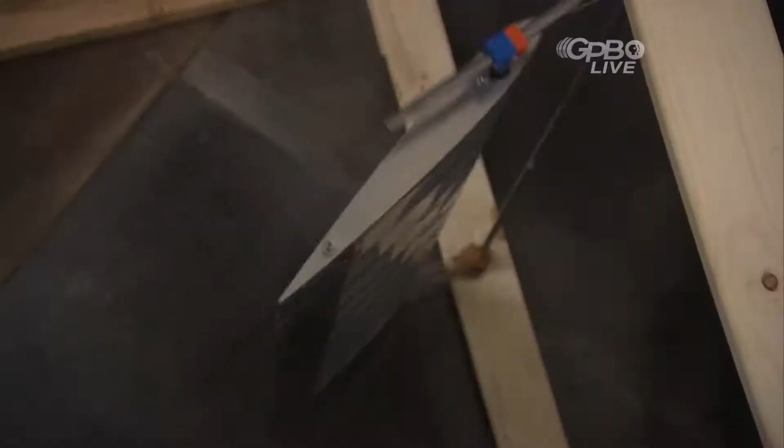Live from the campus of the Georgia Institute of Technology, it's the 2013 Georgia Tech InVenture Prize. Join us as the nation's brightest students unveil the future and compete to win $35,000 in prizes and patents. Now, please welcome your host from Georgia Public Broadcasting's new series, The Future Files, Faith Salie.

And welcome to the 2013 Georgia Tech InVenture Prize. I am thrilled to be back in Georgia on this amazing campus and your host for this evening. And I'm feeling a little overdressed. Do I have goggle face? Right? It's like hat hair for really smart people, right?

Okay, there, that's better. You are about to see a fantastic show because as impressive as this school is, tonight's show is about the best of the best. The 6 teams you'll see tonight have been working on their ideas for anywhere from 6 months to 16 years.

That's right, several of them were inspired by moments from their childhood, and they've used that inspiration to create some extremely sophisticated inventions. Now, this is not exactly what I would have been inspired to invent at that age. My ideas would have been something more like, ice cream that turns into puppy dogs when you lick it. Now, I'm not saying that's a bad idea, but these are much, much better.

One of the biggest problems that we found was shrinking down the transformer into a smaller size. With a little creative circuit design and many long nights, we found a way to make it possible. One of our not so fortunate prototypes actually exploded on us in the lab last night. Yeah, that design went out with a bang.

We think we have a good shot at winning the InVenture Prize because we're addressing a problem almost everybody has. There are over 100 million smartphone users in America, and we feel that we have a solution that will help all of them.

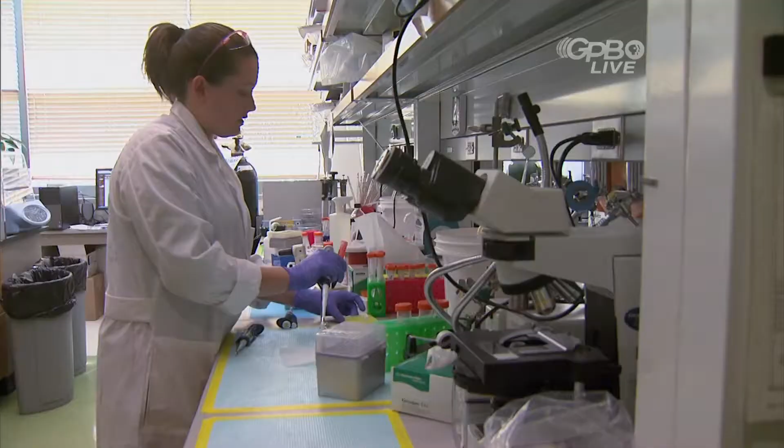Hello, my name is Erica, and I'm part of Team AnemoCheck. The AnemoCheck started as a senior design project in the biomedical engineering department.

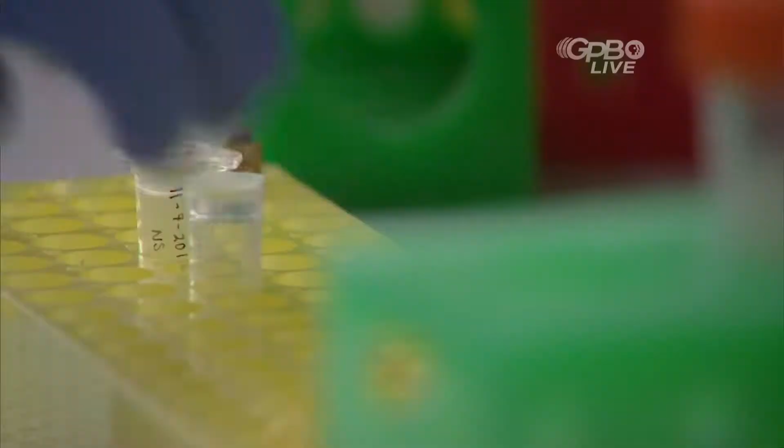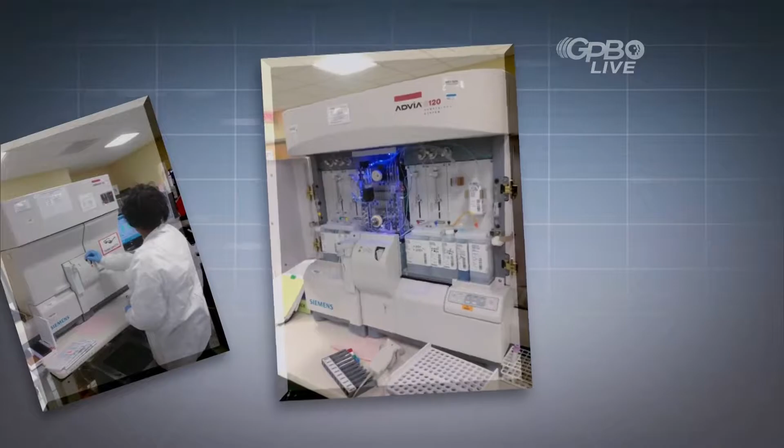Our aim was to create a way to monitor and screen for anemia in a disposable and inexpensive way. There are a lot of problems with current anemia screening. The golden standard is using a hematology analyzer. These machines cost tens of thousands of dollars. They require trained technicians to use, and there are just a lot of problems for people that want to screen themselves multiple times a month, on a weekly basis.

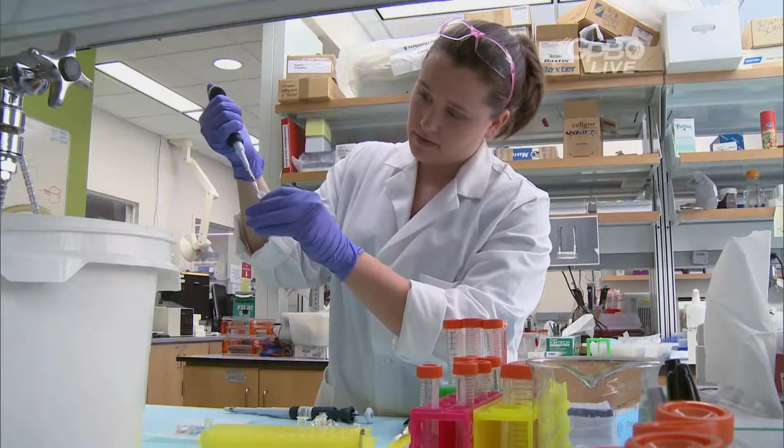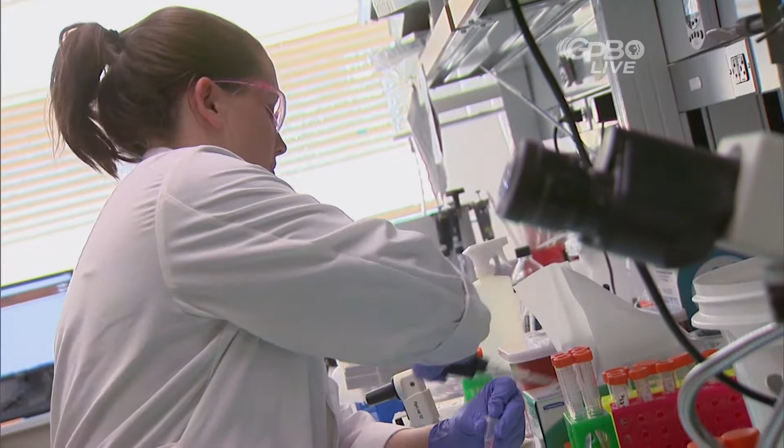We found a way with the AnemoCheck to give people the option to test themselves in the comfort of their own home. We've given them empowerment to see how they're doing when they want to be tested. It's very important for them to actually know, and it gives them a little bit more convenience and comfort. I think my project would help millions of people in this country alone.

I was very driven to work on this project as a senior at Georgia Tech because I had issues with anemia when I was growing up. It just made it all the better finishing off my career at Georgia Tech to be able to work on this.

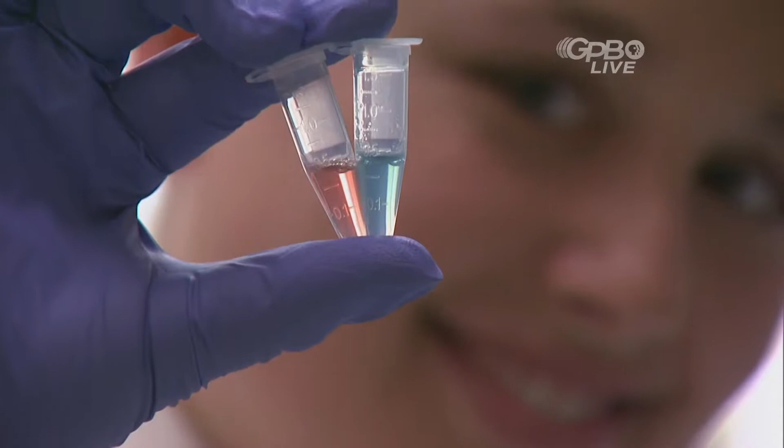They had started thinking about their idea many years ago. So let's not make them wait any longer to present it.

Good evening, ladies and gentlemen, esteemed judges. It's my absolute honor to be here tonight. My name is Erica, and I want to talk to you about anemia.

Anemia is the world's most common blood disorder, affecting 1 billion people yearly. In fact, it's so common, 100 of you in the audience tonight are being affected by it right now. Anemia causes fatigue and tiredness, but in severe cases, it can cause brain damage or even death.

And we've all been screened for anemia. We've gone to the hospital, had to wait in line, endure a venous blood draw, and had to wait longer for people to process our results. If you're healthy, this happens once or twice a year. But for 15 million Americans, this happens on a monthly or even weekly basis. This is just too inconvenient and costly for people to have to do.

I'm proud to say we've invented a solution. The AnemoCheck is an at-home anemia screening test. It's very simple to use. All one does is prick their finger, collect blood, put that blood into our chemical tube, mix, and wait. After 45 seconds, the final color in the tube correlates to a hemoglobin level.

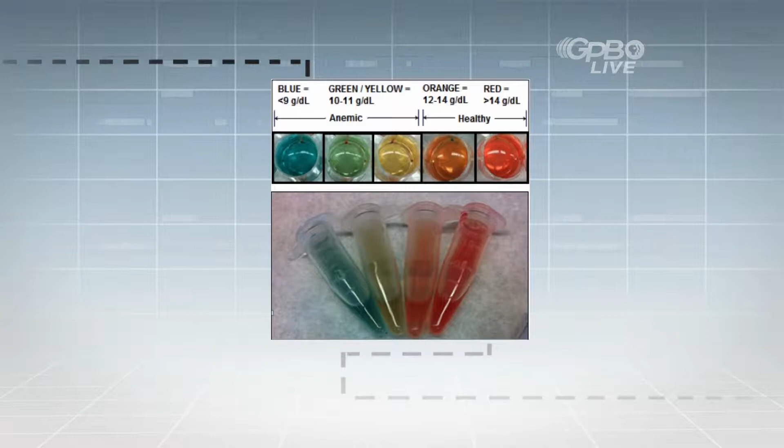The colors range from blue to red, as I have here, indicating different levels of anemia along the way, if any is present. What we've been able to do is take a known chemical reaction and turn it into a whole blood diagnostic test. No one has ever done this before. It's novel and non-obvious.

Now I'd like to shift gears. I have with me Reginald and Rob, and they've just tested themselves tonight using AnemoCheck right in front of you on stage. In a short amount of time, I have their results for how they're doing.

I hope you can focus in on that, but they're quite different. As you can see, Reggie's results indicate he's healthy and not anemic. But in contrast, Rob's indicates that he is moderately anemic and should be treated.

Rob, could you tell the judges a little about yourself? I'm Rob Menino, and I have thalassemia. Thalassemia is a genetic blood disorder that causes me to be chronically anemic. And for treatment, I require regularly scheduled blood transfusions.

But with this device, I would be able to schedule my blood transfusions for when I really need them, as opposed to guessing when I'm going to be anemic. And recently, I've gotten the chance to actually use this device, and I would buy it. Thanks, Reggie. Thanks, Rob.

To close, I just want to tell you, I've been working on this throughout my undergraduate career, and since graduating in May, I've joined a lab jointly at Georgia Tech and Emory in order to pursue this idea. Since May, we've gone from clinical feasibility through verification testing, and we are now IRB approved in a clinical trial on real patients.

I'm really proud of that, and I hope you can see the value we have here. Alongside our clinical trial, we want to prototype our design with the Global Center for Medical Innovation. We want to bring new ideas to the table for making this a user-friendly product.

While there's no clear path to winning the Georgia Tech InVenture Prize, our invention will win the InVenture Prize. I should win this InVenture Prize. I should win this year's InVenture Prize.

All of this year's contestants had access to plenty of advice on the best way to make it to tonight's stage. That advice started last November when former InVenture Prize winners visited the Georgia Tech campus. This really helped kick all that off and get me going in the right direction.

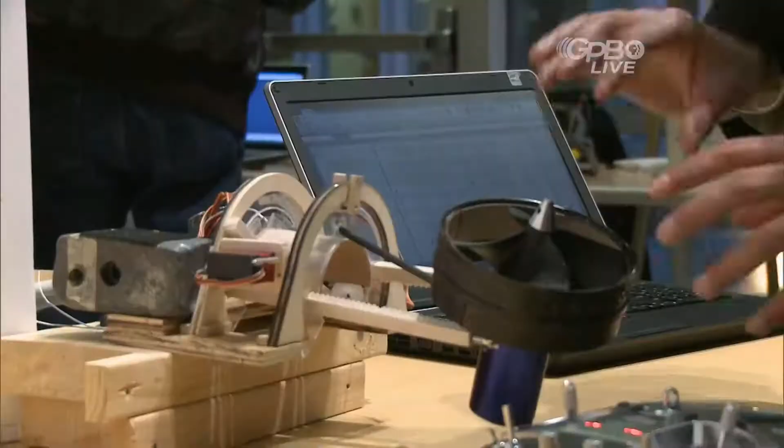That was enough to jumpstart participants to December's capstone event, where 80 teams unveiled their inventions to the masses in the biggest capstone event ever. Thank you all for coming tonight to the Capstone Expo.

I got some news for you. Organizers gave 10 lucky teams golden tickets, allowing them to skip the quarterfinals and go right to the semis.

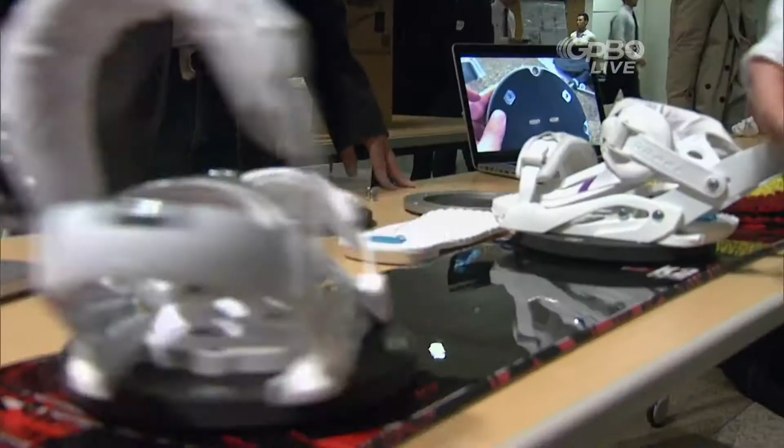Of course, teams at the quarterfinals had their work cut out for them, trying to stand out among 60 new inventions, including everything from a twist on the classic umbrella—the umbrella itself is inverted—to a flying car. Yes, I am inventing a flying car.

And contestants found one line consistently got the judges' attention: My invention will save many people's lives. It can save lives. This could definitely save lives.

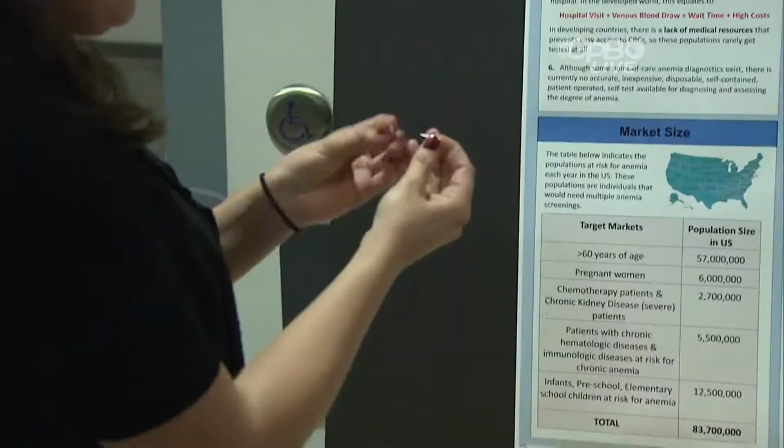From this diverse group of competitors, 26 advanced to the semifinal round, and this coveted category came with an invitation to a Flashpoint workshop to get one more round of advice.

Tonight's work is all about getting your pitches ready, before having to face their toughest questions yet. How are you going to convince people that it actually works? Show us that you've done your homework. I mean, if you guys are serious, or if this is just a school competition, I don't know.

And after the last idea was pitched—we've come here today to show you a product and a solution, now is really the right time for this device to come along, and it will provide our users with a step-by-step solution—the last question was asked: Does it work on raccoons?

6 teams remain standing. Oh, that's pretty cool. Leaving just one question unanswered: who will win the 2013 Georgia Tech InVenture Prize?

Who will win this year's InVenture Prize? Luckily, I'm not eligible—lucky for me, that is, because I'd probably embarrass myself. Need I say more than puppy dog ice cream? The point is, it could be somebody you've already seen, or it could be someone you're yet to see.

It could be these guys. Hi, I'm Zach Zaleski. I'm Joe Hickey. And we're Team Infant Sleep Solutions.

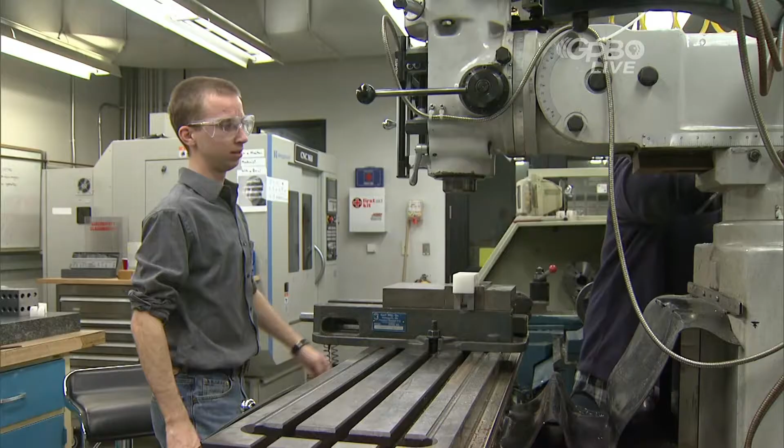So one of the big problems facing parents is some children are difficult to put to sleep. One of the effective means that parents have found is to take them on a car ride. There are a lot of products to help you put your baby to sleep, but they all have shortcomings—they're bulky, they have limited motion patterns, they're just not effective in putting your baby to sleep all the time.

We actually came up with this idea last August, and we worked on it for about 30 hours a week for 4 months straight. The coolest moment was about 3 months into it, when we finally had a product that was able to produce soothing motions and combine all the systems together.

Last semester, we had the opportunity to compete in the Capstone Design Expo. Team Infant Sleep Solutions, come on! And there we won the People's Choice Award, which confirmed to us that our device is something that people want and will do well in the market.

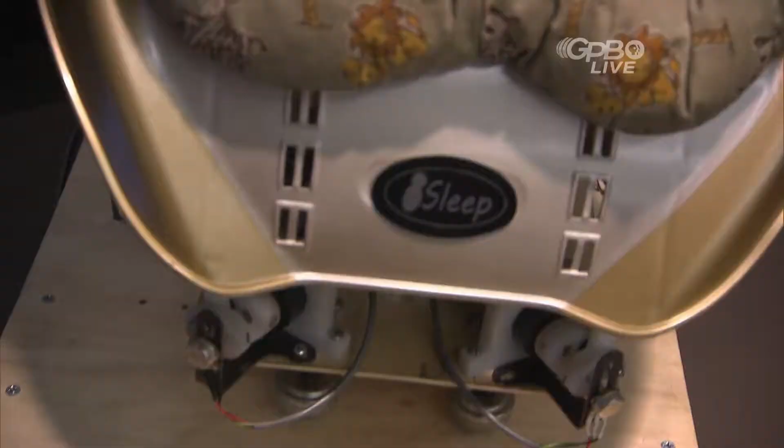I think we have a great shot at winning InVenture because we have something that people actually want. We've had the opportunity to show it to a lot of moms, and they always say, 'Where was that when I was having my kids?'

Intrigued. I'm a little creeped out by that baby, but I'm very intrigued, and I'm sure our audience is too. So tell us what you've got.

Team iSleep. Hi, I'm Zach Zaleski. And I'm Joe Hickey. Together, we are Infant Sleep Solutions, and it is our honor to present to you the iSleep. My 10-month-old niece inspired this product because, like many babies, she sometimes has trouble falling asleep.

Whether they're too overstimulated or tired, car rides are a proven effective method to help children fall asleep. However, it can be incredibly inconvenient to go for a car ride every night, and some of the alternatives that caregivers come up with in their desperation can be a little bit dangerous.

I had a taste of some of the difficulties that families can face on a daily basis when I was visiting my brother and his family. My niece just didn't want to take a nap. She cried and cried, and nothing would calm her down.

So we put her into her car seat and clipped it in the stroller to go for a walk. After a while, she fell asleep and we brought her back inside. But as soon as we put her car seat on the floor, she woke up again crying. I rocked her car seat back and forth and side to side, and she drifted back off to sleep.

And that's when it hit me: why is there nothing that can do this?

Combining my experiences with stories from friends and family, I set out to use my Georgia Tech engineering skills to make something that could mimic the motions and vibrations of going for a walk with my niece or taking her for a ride in the car.

We wanted to make something that'd be safe, comfortable, and convenient, and could help your child fall asleep without ever having to leave the home. It's with all that in mind that we created the iSleep, a soothing motion platform that can recreate that walk in the park or ride in the car and help fussy babies fall asleep and sleeping babies stay asleep.

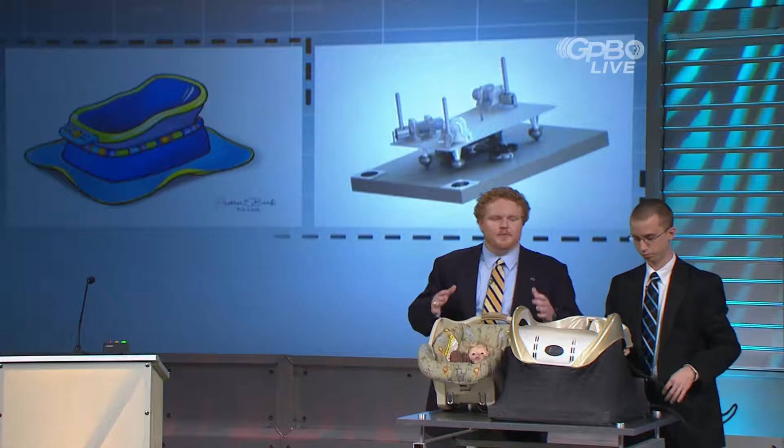When parents bring their child's car seat in the house, they set it on the floor, taking up space in a room that's already filled with a crib, stroller, diaper bags, toys, and all the other things it takes to raise a child. Instead of wasting that valuable space, simply take your car seat, clip it in the iSleep, turn it on, and your infant soother is ready to go.

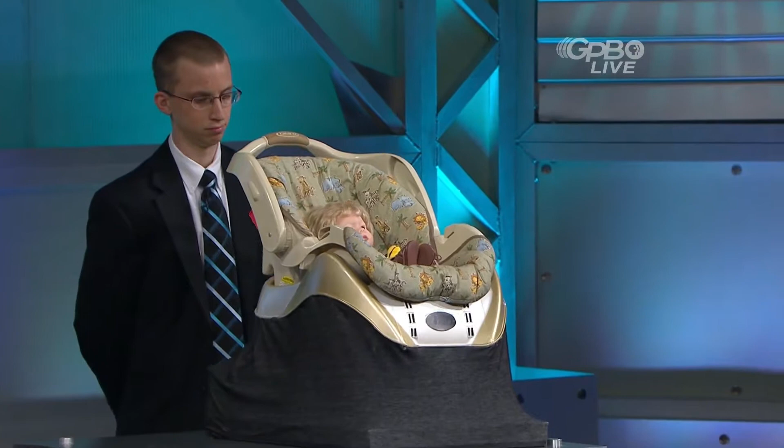Last semester, we had the opportunity to compete in the Capstone Design Expo, where we won the People's Choice Award, which confirmed to us that this is a product that the moms and dads of America want. We've also had the opportunity to share this design with some moms groups, where the reception has been overwhelmingly positive. They always ask, where was this when my kids were younger? Or, can I buy this one and take it home today? Because they believe that this is the device that will change their lives.

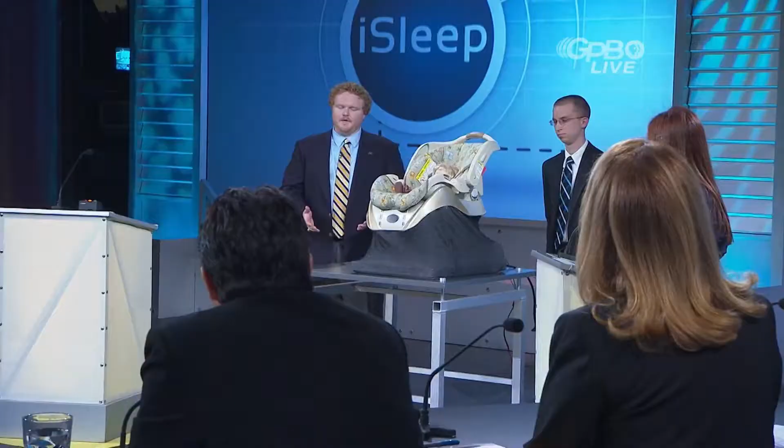And it's not just parents that are interested in the iSleep. We've attracted the attention of a major infant products manufacturing company. Winning InVenture would move us one step closer to getting this great product into the hands of moms and dads everywhere. Thank you for your time and consideration.

Well, guys, I have a baby and I don't have a car, so sign me up.

But judges, what do you think? So tell us a little bit more about the motion patterns. You said a walk or a drive. Are there two different settings? How does that work? So we have multiple different motion profiles you can select from. We're still refining those. But what we did was we did some accelerometer logging with car rides and some various competitor products, and then compared that to what we're able to generate with our device.

What price point are you thinking of entering the market at? So the way it's currently designed, we're targeting around $250. We'd like to further refine that and get it down to about the $180 price range.

And I know you did a pretty extensive category review while you were working on this project, and you know that's sort of at the upper end of the pricing. So can you tell me a little bit about how you feel that this would merit that in the market? So our device can do essentially what every other device on the market can. There's a lot of different devices that swing sideways or glide front to back. Our device is able to mimic the motions of any one of those. So rather than having to predetermine what your child will like before you even know, you can get one device that you know they will like.

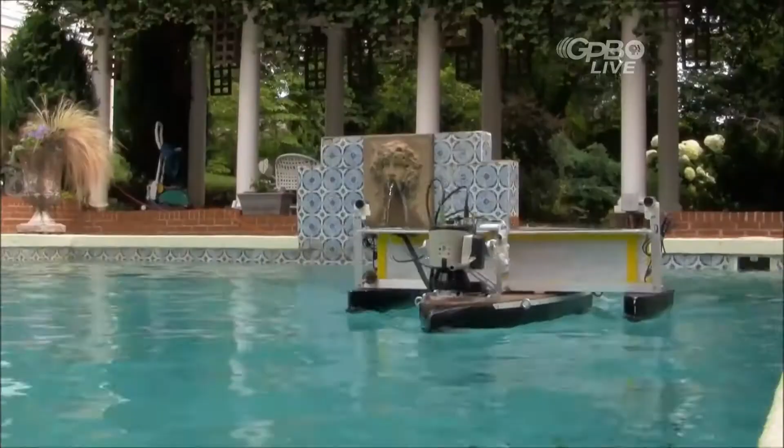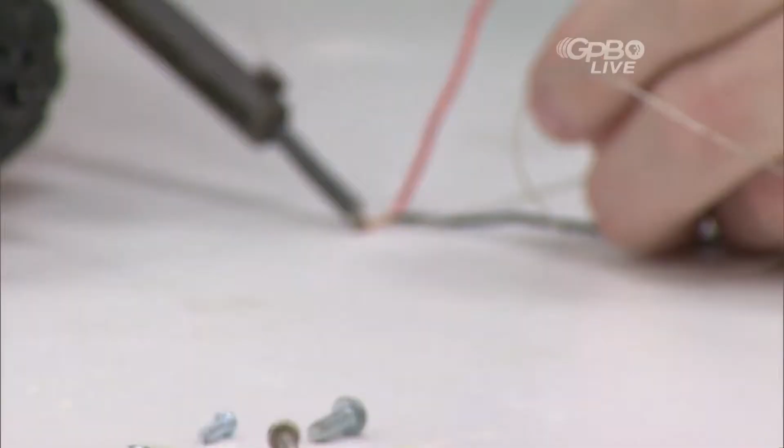Hi, my name is Chris Taylor. I've invented a line of fully autonomous robotic dog toys. I'm a mechanical engineering major, and I've been designing robotic systems for about 10 years. I've built about 8 different robots, everything from fully autonomous boats to a robot that picked up my high school diploma. Current pet toys on the market are either squeaker-filled or a ball that the owners throw, and there just hasn't been a lot of innovation in this industry, and I aim to correct that.

The real breakthrough moment I had was watching my mom play with her dogs. She was throwing this toy over and over again, and I thought, hey, I can make a robot to do that. I'm really passionate about robotics because it offers a very unique challenge and it allows me to get my hands dirty, which is something I really like to do.

So I'm really proud of the fact that I had this idea and I was able to execute on it, and so far there's been an enormous positive reaction to it. I think it has a good shot at winning the InVenture Prize. It's a space that needs innovation, and I'm really passionate about it.

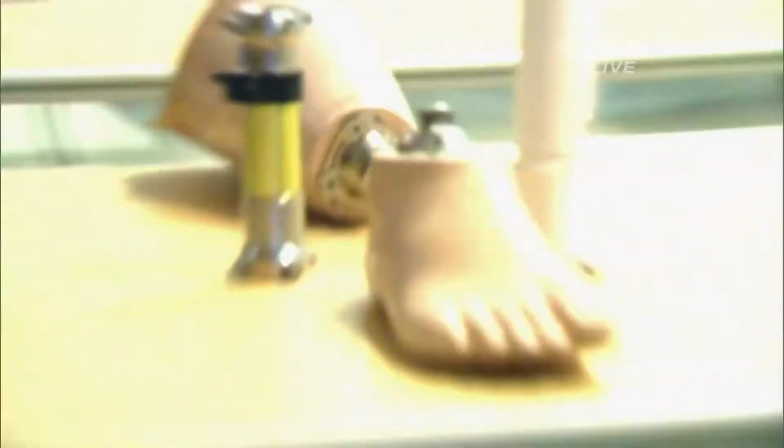We're Team Dinosaur with a Katana. We're Team Vertical Horizons, and collectively we are known as the Rat Pack. We are Team Robodroid. Team Protera. Team Uvinia. The Racketeers. My team is just me.

What I invented is a reusable system for sending small satellites into orbit. My approach was to go right underneath the armpits. Our invention is a modification on an amplification device for DNA that the CDC uses to detect malaria. That's kind of ridiculous.

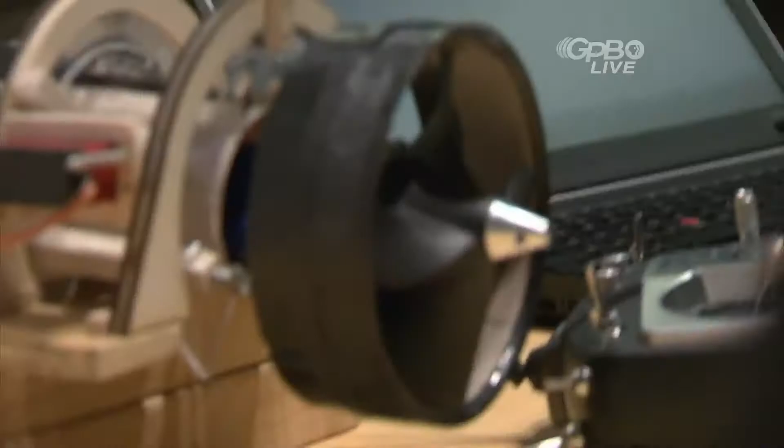What I've invented is called the Easy Eraser. When people write, they make mistakes. Digitally controlled analog device that distorts guitar signals. And at Georgia Tech, we make a lot of mistakes.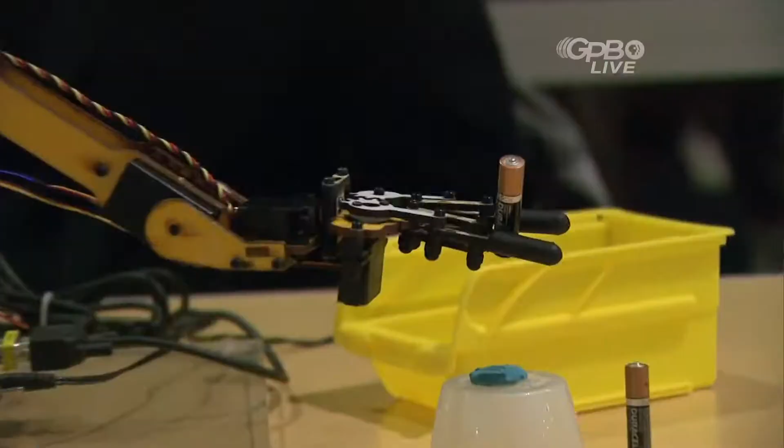We're Team RoboBear. Can you make it hug? Thanks, a cute way to connect people together. He has a magnet on his tongue, and as he moves his tongue, he can control the robotic arm. Hey, Roger Federer, you should get behind this product because it's going to be huge. Wow.

Even the inventions that didn't make it to the finals are impressive. Satellite launchers? Georgia Tech has to do this show because no other school could create inventions of this caliber.

I mean, don't get me wrong, all due respect to UGA, right? I mean, where would we be if they hadn't invented second place?

Our next team will have our audience on pins and needles, or at least pins. And that was probably the worst pun ever, but you'll understand it when you watch this.

Hi, I'm Steven Wosio, part of Team BioPin. Think about how much you use PINs to protect your vital information. As smartphones become more prevalent, especially for things like mobile banking, it's more important than ever that PINs are secure. Scott and I realized that there was a problem with the security of PINs based on how much people use them to protect the most important information that they have.

We realized that especially on touchscreen phones, you can collect other information like timing and pressure to better secure a PIN number system. While trying to come up with a solution to this problem, we went through countless algorithms and spent plenty of hours on the computer.

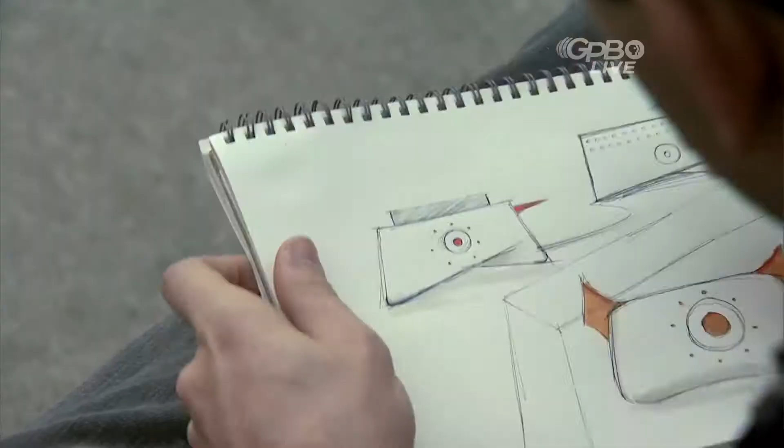Hi, I'm Bashir and I'm Team Hue, and I've reinvented the toaster. I'm a 4th-year industrial design student. One of the core principles of industrial design is solving problems, and one of the problems I encountered was that people simply don't trust their toasters. Toasters have been around for over a century and yet people still burn their toast regularly.

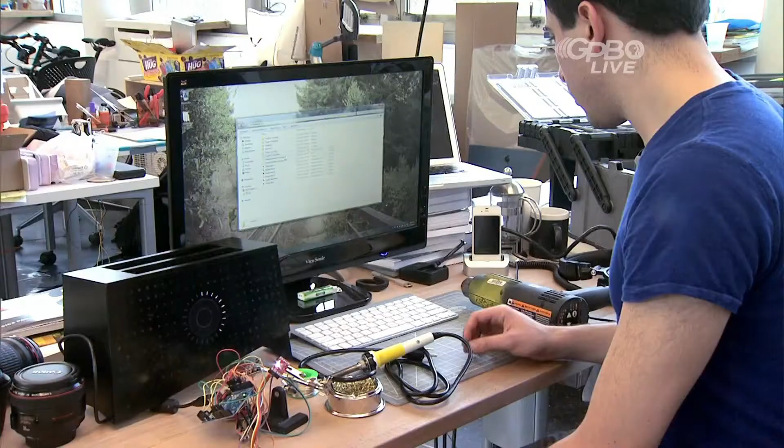How do you communicate with the toaster? Right now you have maybe 2, 3, 4, 5 numbers to pick from. And really, what does that even mean? Does 4 mean it's not going to get burnt this time? It isn't like steak where there's medium rare, medium well, well done. All you have is the color to judge from. I think I found a way to fix it.

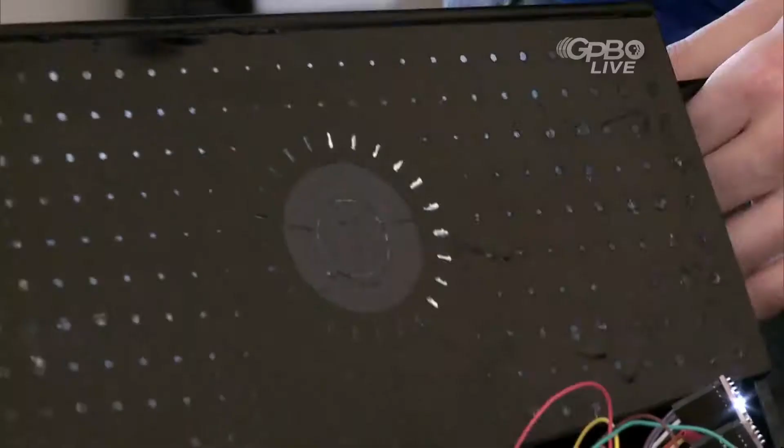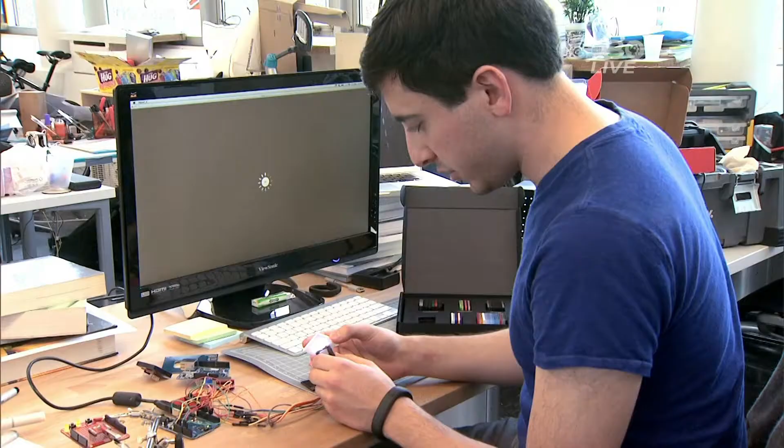What really is important, especially when using a product, is the interfacing between the people and the actual product itself. You can have the best technology in the world, but if people can't use it or don't understand it, it doesn't do them any good. I think I've got a pretty good chance at winning the Inventor Prize because this is something everyone deals with every single day, especially in the morning, when they're really not up to dealing with huge problems.

Until I've had my coffee, don't ask me to operate any kind of equipment. But this guy might have the fix. I give you Team Hue.

Hi, I'm Bashir, and I like toast. And I'm willing to bet that a lot of you like toast too. Over 90% of American homes own a toaster. Yet, for as long as toasters have been around, there's been pretty much no innovation on them since the dawn of their invention. And really, if you look at the problem, they're still impossible to use because it's a complete gamble what you get out of them.

Now, you'd think it'd be just as easy as setting the dial to 1, 2, 3, 4, or 5, but think again. Backstage, I set each of these toasters to 5, and let's see what we got out of them. Now, the first, this is 5. It's nearly burnt, a dark walnut color. Wait, no, this is 5. It's a medium tannish color, about halfway done. Or, wait, no, this is 5. It's uncooked, basically raw. Now, I've set all of these to 5, but do these look like the same number to you?

It's just sort of a shame, and it's really unpredictable. And the last thing you want to do in the morning is to babysit your toaster, just trying to make sure it doesn't burn a slice of bread, let alone burn your house down. Now, this is what I would wish I could have every morning.